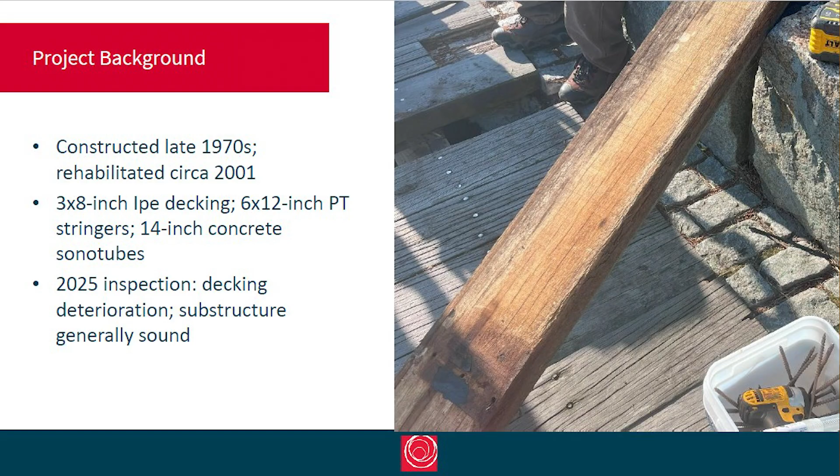The boardwalk was originally constructed back in the 1970s. And that boardwalk was initially constructed with southern yellow pine. In 2001, a rehabilitation effort was completed for the boardwalk that reused the existing substructure. So basically anything other than the walking surface was generally reused. And at that time, the city replaced the timber decking with a 3x8 ipe decking, which is a tropical hardwood.

Underneath the ipe, there are stringers that are pressure treated pine, and then there's concrete sonotubes or foundations that extend down into the soil, and that's what ultimately supports the boardwalk that we walk on. This past summer and fall, GEI completed an assessment where we actually took up some of the boards to evaluate the boards in their entirety, as well as look at the substructure, those stringers, the concrete sonotubes, and other elements that are underneath the boardwalk. Generally, we found the material that is not exposed to the weather to be in pretty sound condition. So, you know, that was a really positive find there.

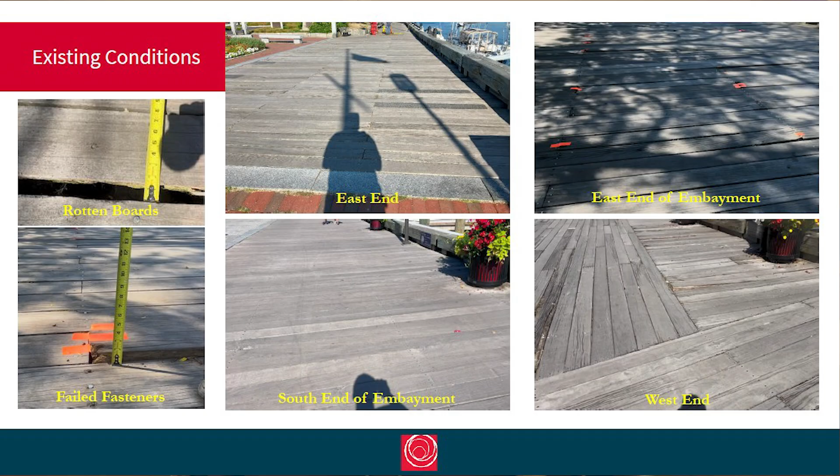But obviously, I think at least most of you have walked on the boardwalk. There's a lot of deteriorated deck that's out there. And with that, we observed a number of rotten boards, a number of tripping hazards. Those are typically because of fasteners that extend down into the stringers that have failed. They either have gotten water down there to corrode the actual fastener itself, or the timber has failed in that immediate location.

So those were the main items that we found. There's also some transitions between the hardscape that's around the edges of the boardwalk and the timber boardwalk itself that creates some elevation changes that are potential tripping hazards. And we also found some areas of the decking, particularly at the southern end of the embayment, that were really in pretty good condition, that don't require a lot of overall attention.

So we tried to really kind of holistically look at the boardwalk itself, evaluate what its current condition was, and the areas that could potentially be reused, and areas that would be needing some future repair work.

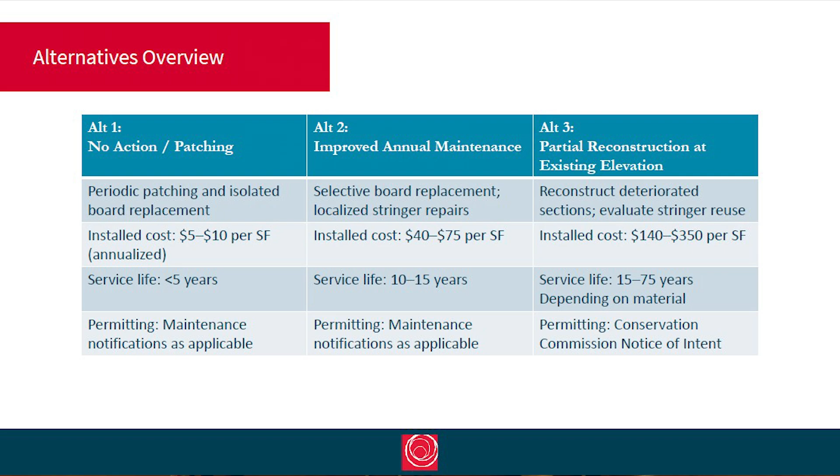Our tasking of the feasibility study really included 3 alternative evaluations. The first being that we don't do anything other than what's being currently consistent out there. This would basically be periodic patching. The second alternative being improved maintenance, securing timber out there, refastening, being much more proactive in the approach. And then the final alternative being to partially reconstruct the boardwalk at the existing elevation. And each of those have different costs associated with them, as well as their overall service life and required maintenance on an annual basis.

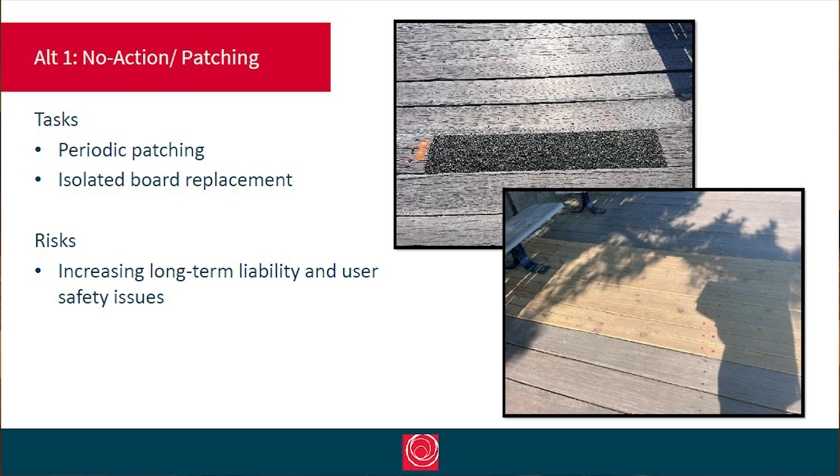So alternative 1 of the no action patching really would just be going out there as currently exists, periodically patching. Some of that is replacing timber boards themselves, or using, you'll see some areas out there that have some flexible pavement, it's kind of like a rubberized pavement, or other alternatives. This really has long-term liability risk for the users out there. We're going to continue to have safety tripping hazards that are consistently popping up. But it is an option. It's the lowest cost option that is out there.

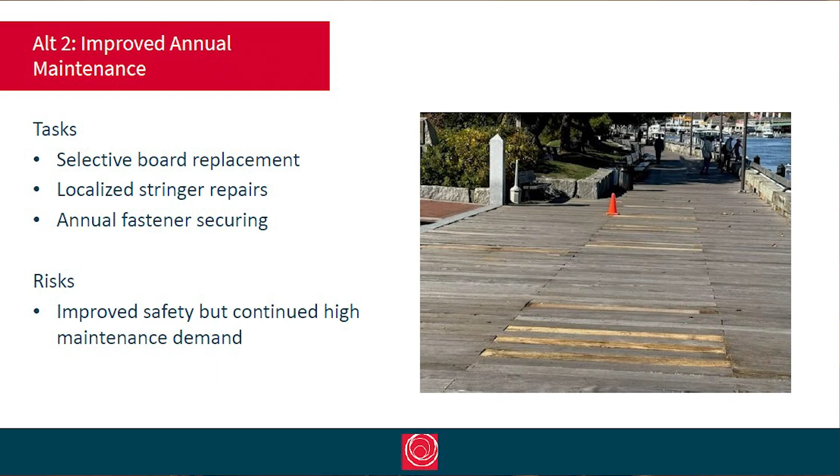Alternative two is improving that annual maintenance. So this would be going out there, selectively replacing boards that have rotted. If there's stringers that are needing repair, working to replace those stringers, and then securing the fasteners and providing annual fastener maintenance that would secure the boards down, eliminate some of those tripping hazards. This improves the safety, but it also requires additional maintenance on an annual and ongoing basis. So, we say annual, that could be multiple times a year that the city or Waterfront Trust is out there having to proactively make repairs. So it increases a lot of demand and effort on their part.

I will say that, as part of this feasibility study, Waterfront Trust and the city have gone out there and done a proactive maintenance repair recently this fall. I believe they installed about 200 fasteners in the boardwalk, replaced and repaired some of the boards that are out there. And then actually within the next couple of weeks, there will be some additional timber that's getting installed. So as part of this effort, we have identified some areas that needed repair, and there's an opportunity to be able to complete some of those repairs.

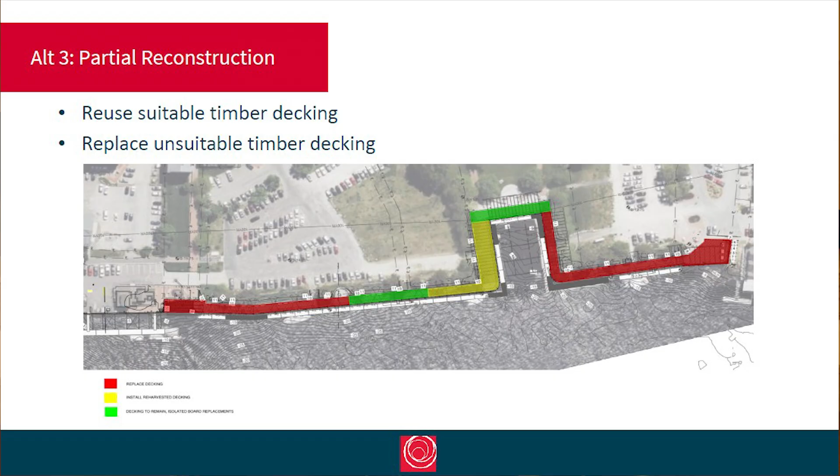And then the final alternative that we've looked at is a partial reconstruction of the boardwalk. This really looks at our holistic approach of what can be used out there. Some of the timber is in really good condition, and some of it is deteriorated. So if we're able to reuse that timber, that provides some cost savings as well as increased sustainability efforts. So within this image here, the two areas that are in green were found to be in really pretty good condition. They would have minor repairs that are needed, but we don't anticipate having to do a holistic removal and repair effort in those two areas.

The areas that are in the yellow and red are areas that have quite a bit more widespread deterioration of the timbers and fasteners. And so we would look to remove all of these timbers within this area, and then selectively reharvest as much of that timber as possible. And our goal there is to really have about 1/3 of that material that we would be able to reuse, placed within that area that is colored yellow, so that you have one continuous area of this existing ipe decking. And then the two areas that are red would be replaced with the new timber boardwalk.

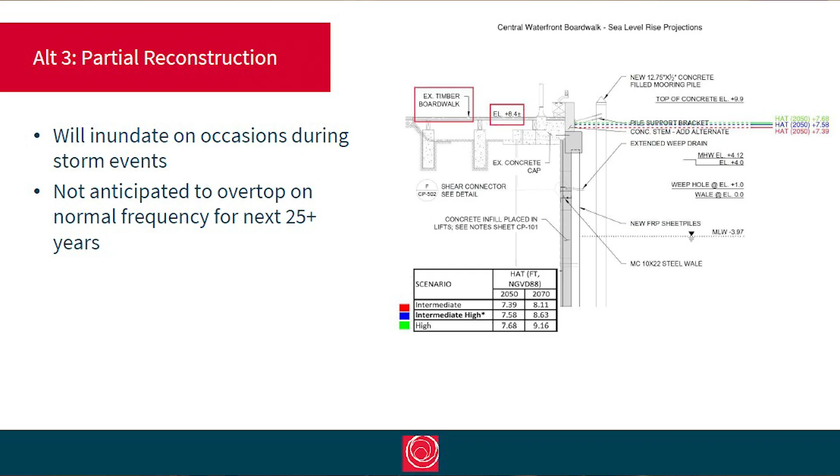We also looked at the elevations of the boardwalk as part of this, and we do note that the boardwalk during storm events may inundate from time to time. However, for the next 25 plus years, we don't anticipate that the boardwalk will overtop at any normal frequency. And so, as part of the recommendations here, is keep it at the existing elevation of the boardwalk as it is today.

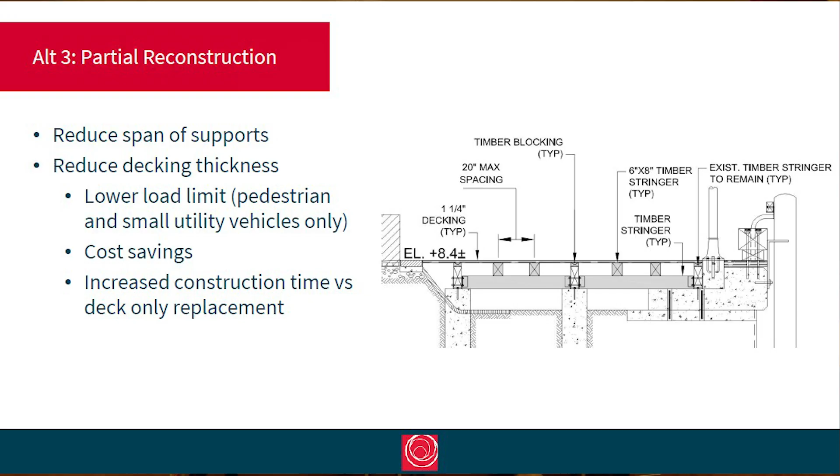We've also evaluated the existing substructure. And some of our recommendations are to potentially look, this would be evaluated further during the design phase, at reducing the span. The spans between the stringers are really pretty wide. They're about 5 foot typical spacing. And that works for the relatively thick decking that we've got out there and the loads that we've got. But it's an unconventional framing for what is often used for decking structures.

So, we looked at the potential of reducing those spans, and this would add some additional construction time to the project on site, but would reduce the material cost of that decking. For instance, instead of having a 3-inch thick deck, that deck might be 2 or even 1¼ inches, which is a typical thickness that you would see on most decks that you're familiar with. So there's some potential cost savings there, and really kind of evaluating what those are.

We also looked at what the use is of the structure in this evaluation. So the boardwalk is not used for vehicles. We've got a couple of small maintenance vehicles that go out there, and it's mostly pedestrian movement that is on the boardwalk.

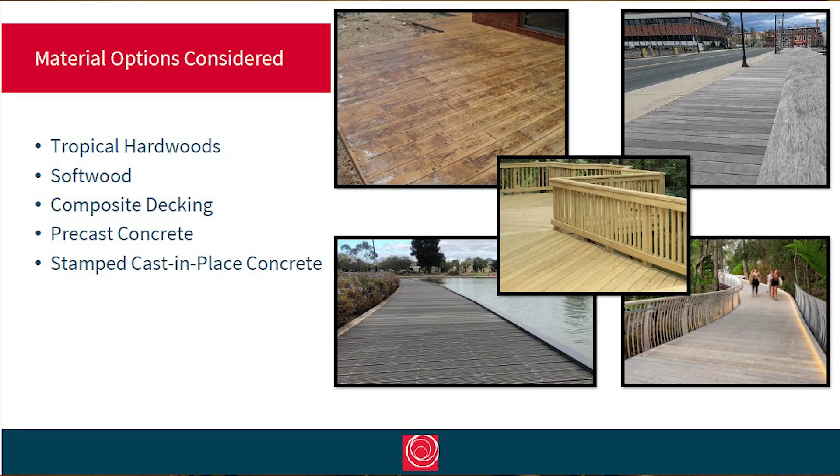So, next, we evaluated different material choices for the boardwalk. Currently out there is Ipe, which is a tropical hardwood. Before that, the original construction was a southern yellow pine that was pressure treated. And both of those have lasted about 25 years. We were hoping to be able to get a little bit longer service life out of the tropical hardwood initially. And there is still some nice longevity, but it is starting to require additional maintenance.

So the different materials that we've looked at are tropical hardwoods, softwoods, like your southern yellow pine, composite decking, precast concrete, and a cast-in-place concrete where you'd actually raise the elevation and place the concrete on the surface. So we looked at all of those, and through a number of conversations with the city and different stakeholders, have identified that the concrete options really don't fit the city's aesthetics and needs for a boardwalk along this historic waterfront. So from there, we've moved on to the other top 3 choices.

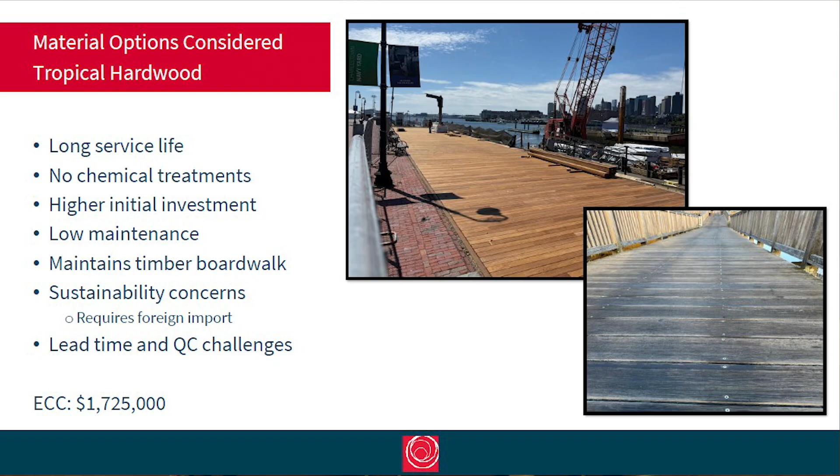The tropical hardwoods, this would be an Ipe. This is actually a piece of Ipe that is out there as an option. Purple Heart, down at the end is a piece of Purple Heart. There's a connection part of the rail trail over by Cashman Park that is using the Purple Heart currently. So it's another option that we've got within the city here.

These are both nice options in that they have long service life. They don't use any chemical treatments, but there are some challenges with them as well. They're expensive. They have sustainability concerns because most of the tropical hardwoods are coming from either Brazil or Guyana, or imports, so if we run short on material, they can have high lead times. There can be quality control issues with getting some of the material here as well. And so these would all have to be factored into the overall construction.

And the estimated cost for the tropical hardwoods would generally be about 1.8 million to replace the areas that are in red and yellow. That's not just material, that's construction costs. So that includes the overall construction of the boardwalk. So it's reharvesting what we can that would go into the area within the yellow, and then the areas within the red would have new tropical material.

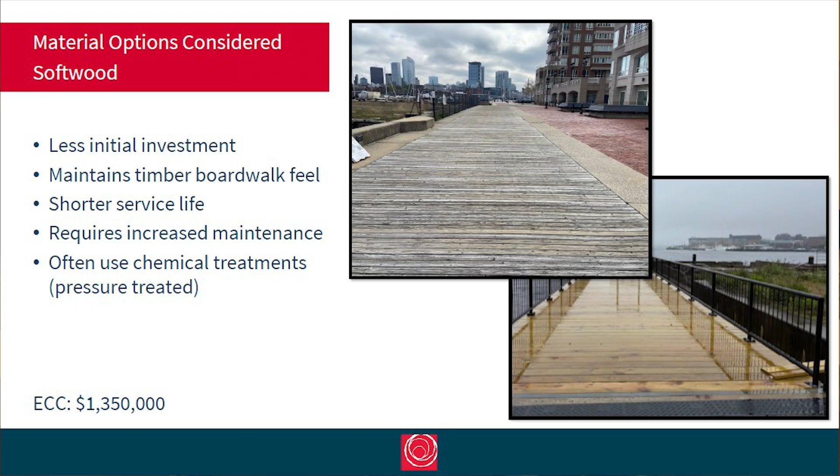We also looked at softwoods. These are less expensive, so there's a lower upfront cost to them. But it's also important to know that the upfront cost of the materials is only a portion of that cost, right? There's also cost for the labor and the equipment that really add quite a bit to the overall cost. So there's not as much differential in materials as you might think. The softwoods would have a shorter service life, generally on the order of about 15 to 20 years, versus the hardwoods on the 25 to 50 year time frame.

So the other disadvantage is that they're going to have chemical treatments. Typically, they're going to be pressure treated in these areas, and really, they do weather pretty quickly. So as you can see here in the two photos, the lower photo is a picture of a freshly installed pressure treated southern yellow pine, and the upper picture is within the same area, but this was installed about 10 years ago, and you can see the difference. The overall estimated construction cost for the southern yellow pine softwood would be about 1.3 to 1.4.

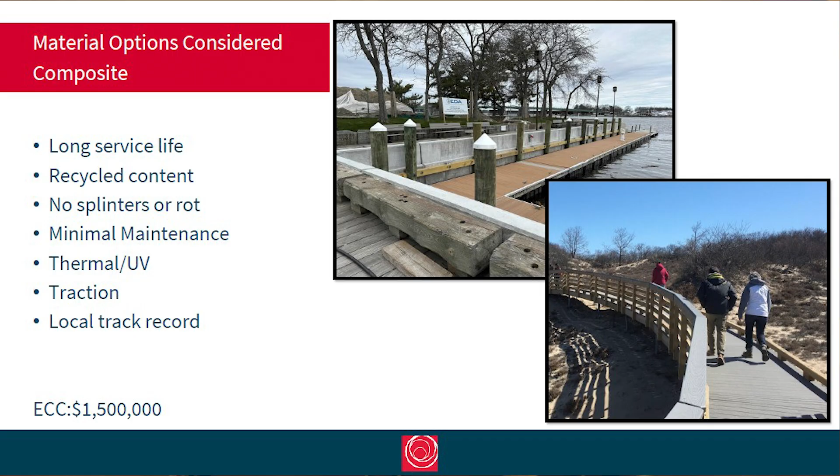It is, yeah. So with the softwoods, they do have increased maintenance. They tend to unravel and open up within their grain quite a bit more. So there's more opportunity for splintering and rot within them versus the tropical hardwoods, or a hardwood is going to have a much denser grain material to it.

And then finally, we looked at the composites. A composite has come quite a ways, even over the last 10 years from what it was. So they've really started to come into the market quite well when you start to compare them. You're going to have a long service life. Again, we're looking at 30 to 50 years. Often, you can even get commercial warranties on these materials that are going to be in that 30-year time range.

They don't have splinters or rot associated with them. Their maintenance is really low. There are some items that we would have to make sure within the specifying of the materials that are selected are addressed. Primarily being UV protection with them and traction. So making sure that they're not slippery material. And so we've got some different materials out here that you can take a look at afterwards.

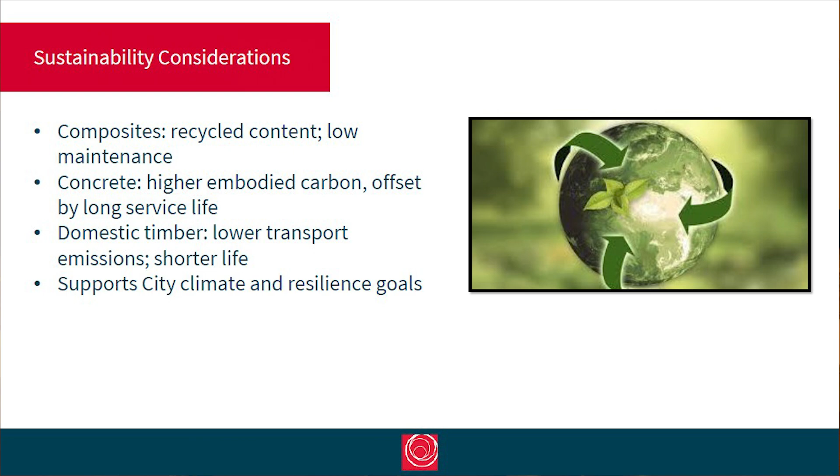So looking at this, we're also trying to keep in mind a lot of the sustainability considerations. So we're looking at recycled content, being able to reuse where we can within the composites, having low maintenance and using recycled materials. The domestic softwoods are going to have low transport, so they're going to have lower carbon footprints. The concrete as well as the hardwoods are really going to have high embodied carbon because of the travel and work that's involved with those.

So trying to provide resilience goals and achieve a sustainable project here for the city has been one of the other considerations.

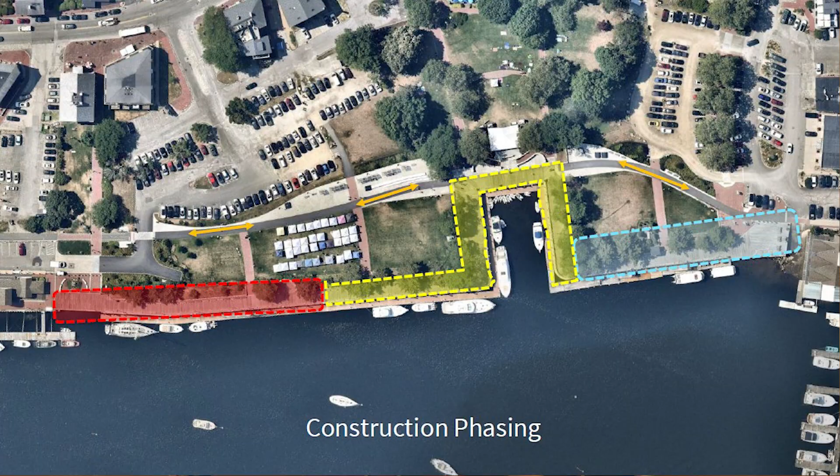Looking at this from just a constructability standpoint, I think it's important to note that this would be a phased project. We wouldn't be looking to go in and take out the entire boardwalk all at once, because we understand that this is an important aspect to the city and the visitors, the residents, and all being able to access this waterfront.

So we'd look to do it as much as we can during the off season, where there's going to be a little bit less foot traffic, as well as phasing it into at least 3 phases here, all while having the new park access way that runs kind of directly behind this boardwalk available. So we wouldn't be shutting off the entire waterfront. You'd be able to circumnavigate around it through that construction phase.

And as the design is progressed, we really would be looking to develop and hone in on what that construction phasing really looked like as far as where materials are going to be stored, what time frames we would anticipate different areas being taken down and constructed, and then ultimately, how any equipment and construction would be able to access those areas.

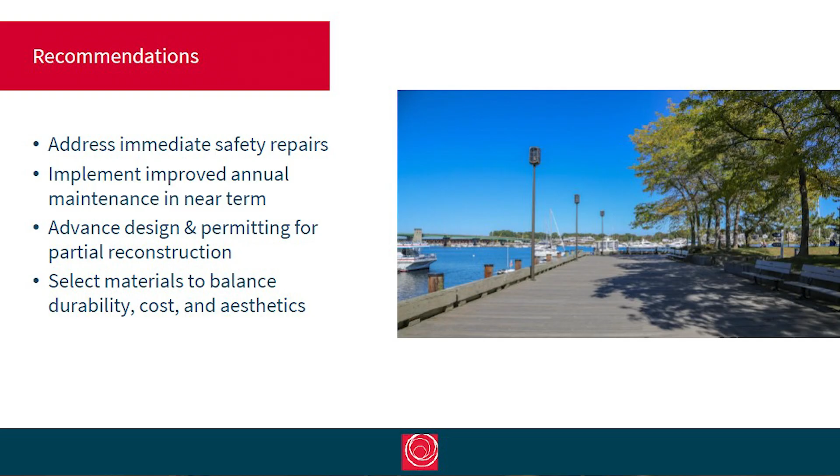So overall, our recommendations are really to address the immediate safety concerns out there, implement some improved maintenance in the short term, and then ultimately advance the design and the permitting that is required for partial reconstruction, and then ultimately work with the City and Waterfront Trust, as well as your input for developing and selecting a preferred alternative that's going to meet the aesthetics, really kind of the cost and durability and maintenance considerations for the city.

With that, I appreciate the time, and we'll turn it back over to Jordy for any questions and public comment. All right, thanks everyone. Not too many of us here, so maybe you could just speak loudly or walk over to the microphone or ask me to hand you this microphone. But let's have a discussion. We'd love to hear what anyone thinks of any of this, or if there's other questions that we haven't answered and so forth. In the back.

Hi, I'd like to preface my public comment with that I don't really care about money or time. The boardwalk should really be made out of granite and brick. Granite and brick, okay. Yeah, I don't know anything about construction or anything, but granite and brick, just like the rest of Newburyport, downtown. Get them back into downtown. All right, we're recording everyone's comments, so we appreciate that. I would say that I think I've heard from most people that there's a fondness for a boardwalk in Newburyport. So I anticipate that's the direction we will probably be going, but I appreciate your comment.